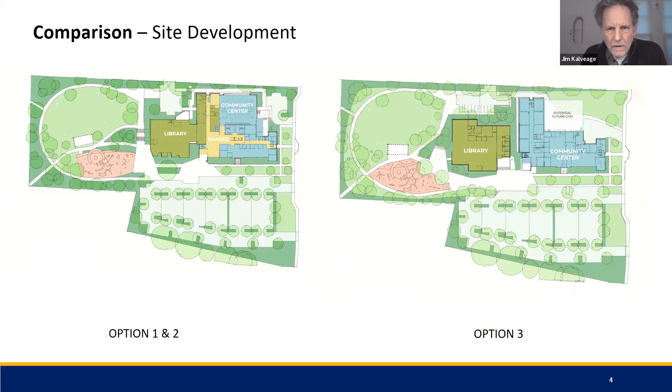This is just an enlarged view of option 3. Go to the next. And what this shows is how we're starting to really think more closely about what that space is between the library and community center.

So now it was previously 20 feet, this is 25 plus feet. It starts to feel quite different. We're showing a pathway that connects from the entry terrace to the library through this garden space. It's actually at the same level as the landing of the stair of the community center, so you can literally walk from the community center through that garden to the library.

As you might recall in the plan of the library, there's the idea of a meeting room tucked up at the north end, the top part of the plan. We're showing the potential, which we're really excited about, of having an outdoor meeting space off of that indoor meeting room, shown in that wedge shape white rectangle. So we're kind of excited how that space is starting to evolve.

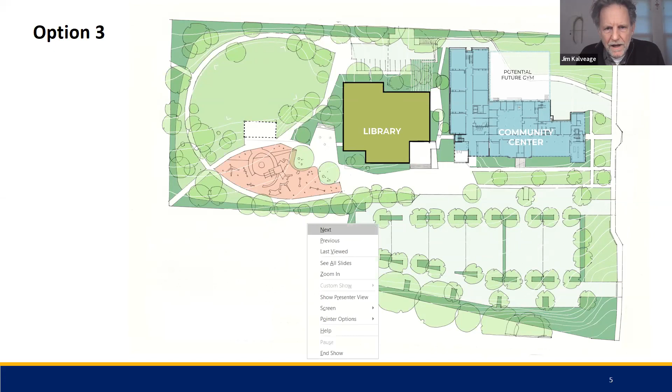Go to the next slide. This gives you a little bit of a close-up of the plan, and then these 3D views that start to show you the potential of that space. We feel like it's at a width now where it feels like it could be a lovely garden.

From that ramp that comes up, there's a walkway that takes you through that sliver part and even up the stairs to the upper part, north end of the Concord property. One of the things this shows too is the massing of the freestanding or standalone library steps down, so the height as you go towards the north is really just a little bit over one story.

And so it starts to really open up the space, something that's a little hard to visualize in plan, but we really appreciate the comment that came up last time, that the space was too narrow before. We feel like this is finding the right balance, where it's a more passive walking space, but it doesn't take away from the overall park.

Go to the next slide. This is another option that was brought up at the last meeting we wanted to respond to as well. As a freestanding library, what if it were located more towards the top of the property, north, plan north, also kind of northwest, but pushed up against the property line. In this case, the library's pulled away, more distant from the drop-off. Visibility to it isn't as strong from Concord as it would be in the prior location.

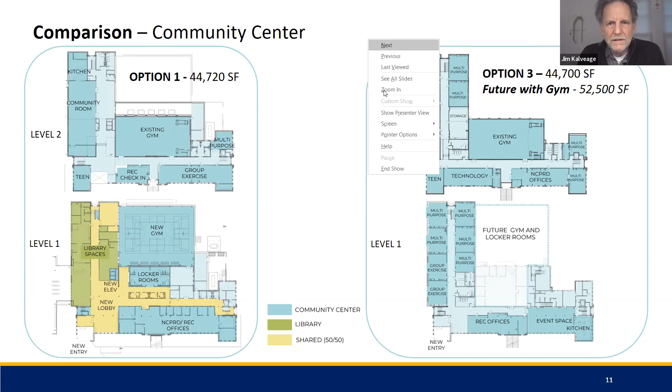There's a lot of discussion about sustainability in option 2, where we didn't have the CLT roof or the radiant floor. It's still a sustainable building. Energy-wise, you can see the long list of features.

The VRF mechanical system is still very efficient. We did a comparison between that and a radiant floor. There's a savings of basically, over a 20-year period, about $20,000 - maybe around $1,000 a year.

But with a radiant floor, you do get the comfort associated with that, and it brings the heat source directly to the occupants. Water design in terms of efficiency is the same.

Still looking at durable materials, bird-friendly glazing, connections to the park - in some ways even more enhanced, I think, in what we're showing now, especially the relationship between the Concord School and the library, which even has more of a feeling of being in the park.

We've looked at the possibility, as brought up, as we showed earlier, designs of a mass timber roof and radiant flooring. Those are additional strategies for discussion. The project isn't at this point a LEED project, but we are using the AIA framework for design excellence.

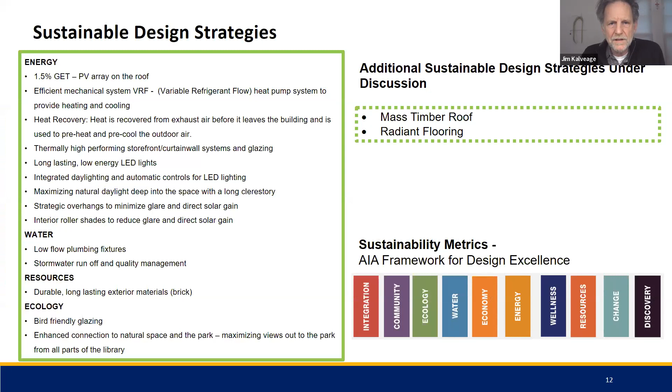We wanted to just compare the addition version here compared to the freestanding library.

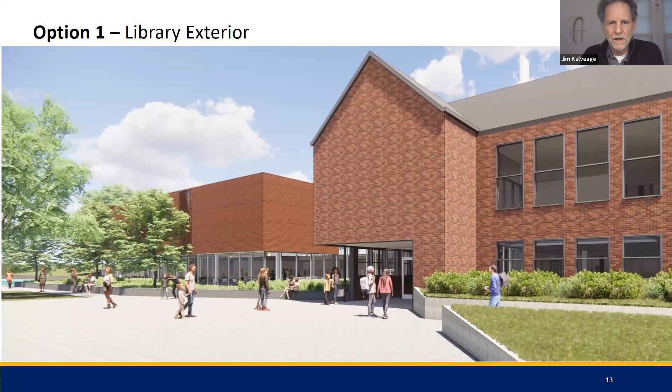Drawing off some of the virtues that we shared previously of the shaping of the roofs of the addition, a little bit larger open space, that kind of sense of entry is really, we think, strong in the library, but also very compatible with the Concord School.

So they're kind of cut from the same DNA, and the idea of a brick screen element that would filter light into the entry porch. A comment brought up at the last meeting is whether there's a way to create some of that brick texture and pattern that recalls the arched window above, the gable roof and entry to the Concord School - that filigree of brick above the entry porch carried around as some form of brick pattern and texture that could really provide a nice human scale and a quality that ties it back to the Concord School.

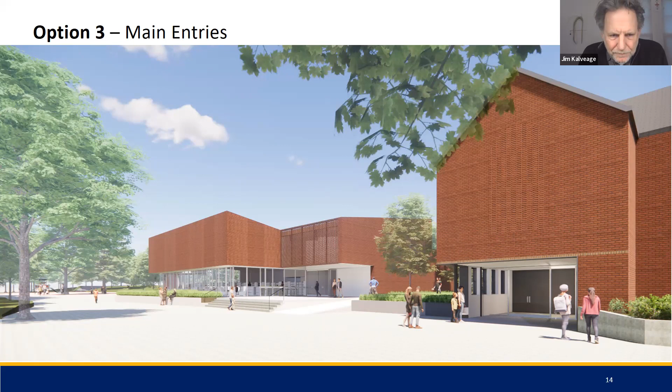Just another kind of view back, how the two buildings start to talk and relate to each other. The kind of openness into the library space as you approach puts the library on display, and then you're looking through the entry lobby, through the meeting room to a north clerestory window.

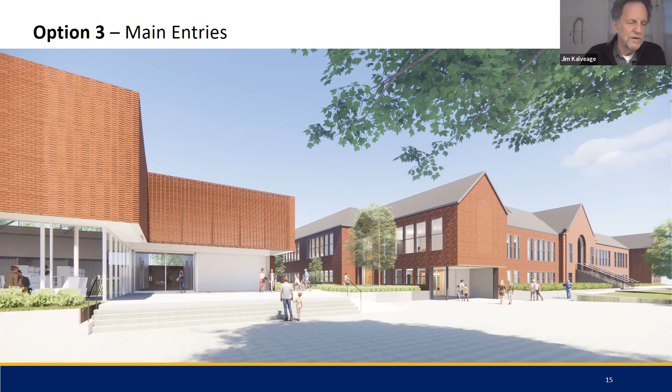We'll go inside here. This is what we showed previously, just the kind of model where everything's whitewashed. One of the things we've looked at more carefully is what is that view to the north or northwest, looking at a skylight there along that solid wall.

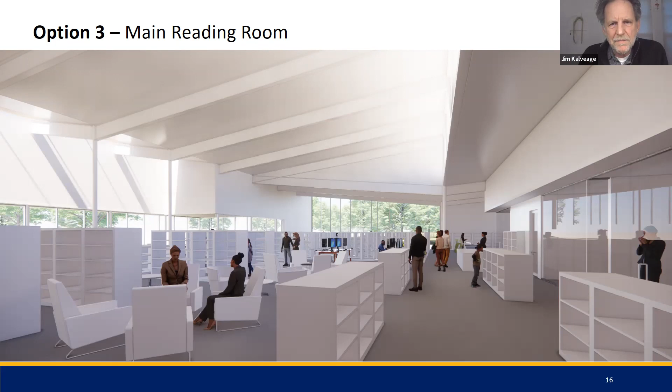So you're getting balanced light coming in from both the north clerestory monitor as well as the skylight that washes that north wall above the lower windows. Also that big framed window out to the park. So it really is about a library in the park and bringing the park into the library, and from the library engaging the park.

This next image starts to show what would happen if, in fact, there is a CLT roof that does bring a lot of warmth and character. CLT can also be DLT - DLT is another type of cross-laminated timber where the wood members are turned vertically and spaced a little bit apart, where there's a reveal and acoustical insulation integrated into it.

We did a project, a new urban school in Clackamas, and it uses DLT. It's a really neat material because you get the visual impact of the wood, the sustainability, and the acoustics all integrated together into the panel.

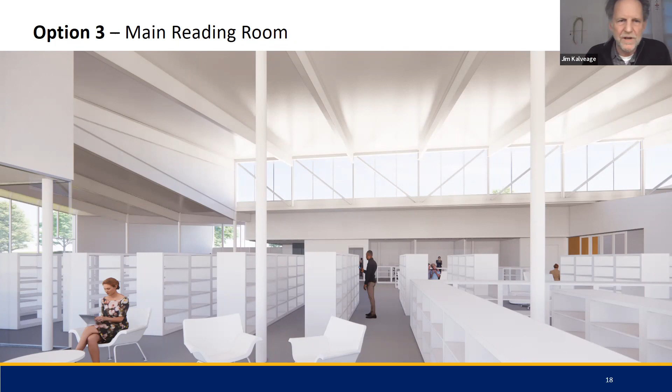But it's a big change. This is when you start to see the difference between a view like this, which has the white ceiling, versus the next image, which shows the impact of using a DLT type product. You also spatially start to feel how open, bright, and connected this building is to the environment, with views to the park and north clerestory light.

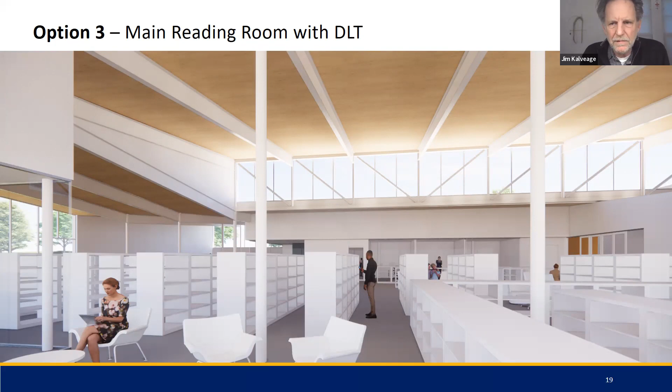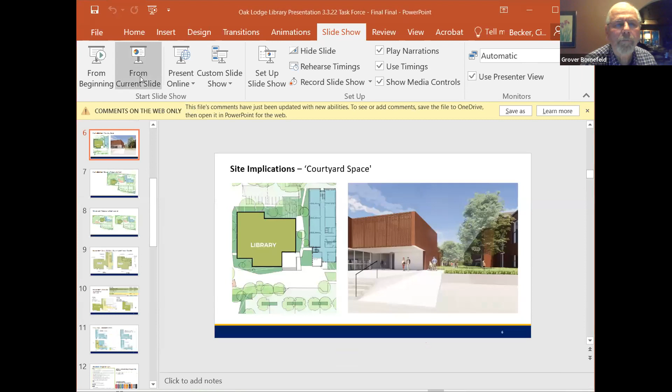Great. Well, what I wanted to say, so I just really did not want— oh good, it's going to come back. Can you see it? Yeah, it's back farther in the presentation where I was referring to, because those lines are— there we go, right there. See, on the other side of the plate, I guess I picked the wrong one. Oh yeah, no, the one you were just on, back one. That one. You see from where the play area is, north or up towards the parking lot, there seems like there's stairs there. Are those stairs? No, on the other side of the play area, up. No, Grover, everything that's in white there, it's just done so it's visible—those are contours.

So that would be a great change. However, I think providing some stairs or seating for parents would be something we should consider, both on this scheme as well as the other one. Okay, good. All right, so what I really want to say, besides thank you for doing that work, I appreciate it. I'm always concerned about how much work gets done with some thoughts from the group, et cetera.

And every time you guys come up with nice stuff, I'm very clear that our job here is to honor the Concord School. But I want to be clear, having it farther away doesn't unhonor it. It actually lets it stand with all its glory from McLaughlin and everywhere else, tucking it around the other way. So the idea is, how do we maximize the park space? I don't want to negate anything you did, but I want to get that in this conversation.

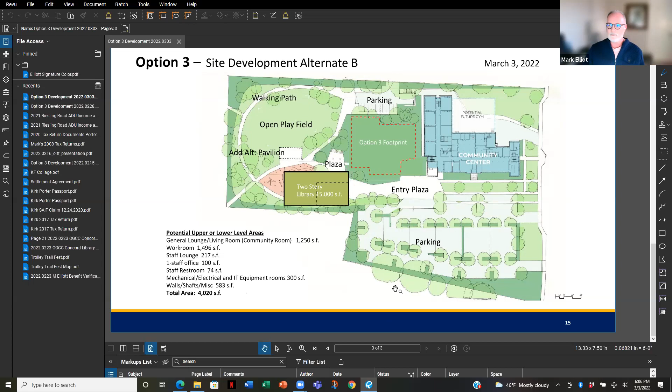The intent here, I think, is to see that by taking advantage of some of the topography, it's possible to consider a lower level for these areas, taking advantage of the topography change. When Grover and I were just looking out there ourselves, we could see something in the neighborhood of an 8 to 10 or 11 foot grade difference between the parking area and the upper open play field area. So that's really what we came up with, just looking at this rather quickly. I'm happy to share that. Thanks.

Thank you. I just wanted that to get put into the mix because it does free up more park space, and it does make a smaller footprint, and it takes advantage of the topography, and less dirt has to be moved. Because I have a real concern about how much water goes through that site. The water was pouring when we were there, through the site, not just from the sky. Yeah, I mean, I think it's... oh, go ahead.

Well, I appreciate that option and I'm beginning to think through it, just from a grading perspective, because I've been staring at the grades and the 15 to 20 foot grade change for a long time. I think the one thing you have out on the site right now is that large play field, and conceptually the idea of putting a structure within that. The issue for us becomes how you navigate that and get ADA access from the upper level down to the lower level.

And how do you put in a play area the size that it is? In order to meet accessibility standards, it essentially has to be flat. So a substantial amount of the grading that has to happen with any of these options is primarily because of the play area and also getting that ADA path up. Regardless of where you're putting the library, you're still having to spend a significant amount of money on that.

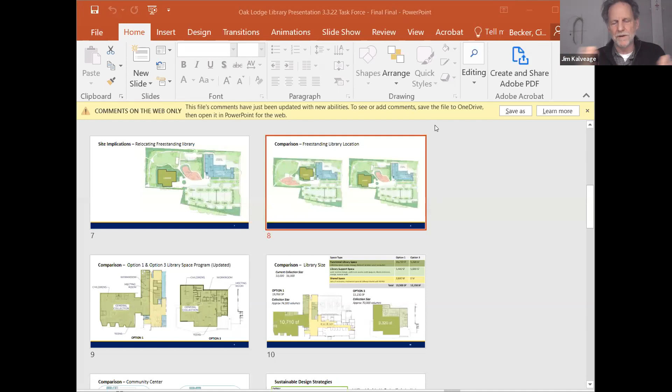And then the separation between the library and the community center, I think they're still on the same campus, but they aren't right next to each other. So the shared use of popping across to a meeting, a lecture by an artist or something, would be it's just physically more removed.

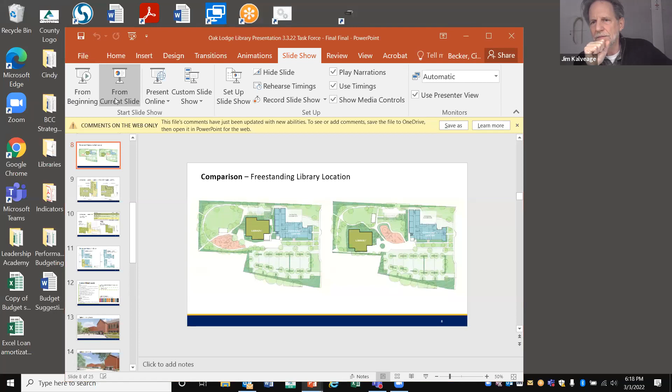Well, one of the things that we've seen in some of the libraries we've visited is when they're located in a park, it's a real nice atmosphere to be able to look out the window and see the park and really get the full view. I was just a little concerned that option 4, for want of a better term, precludes some of that option of looking at a park.

I guess nobody else agrees. Well, if they just flipped it over the other way and rotated it 45 degrees, you'd get the view right up into the park area.

But I want to be clear, the difference between where the 2 libraries in these 2 pictures are and the library, we're not talking 40, 50 feet. So I'm a bit concerned about this comment about no more proximity. Actually, it's a big difference. The entries, there's probably a 200-foot difference. Those parking stalls between those black lines, 60 feet. So it's probably 150 feet. It's not an insignificant distance at all. It's pretty significant.

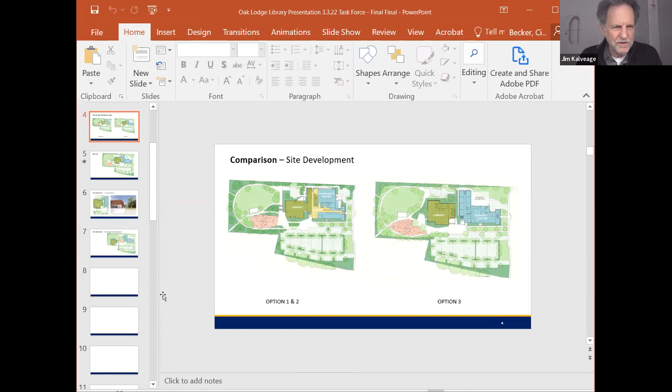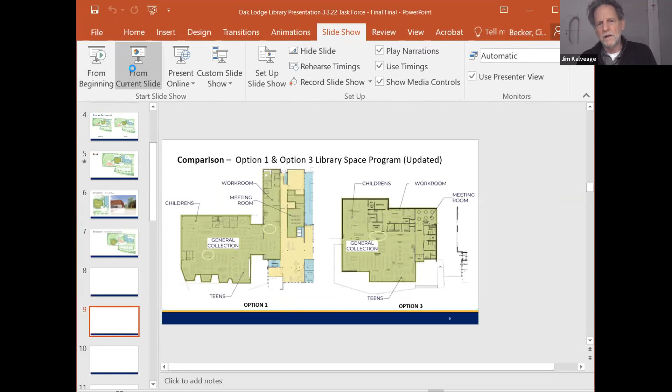This is 25 feet. The next plan kind of shows it a little better - yeah, the number 5 slide. Yeah, there you go. Anyway, I believe, Kurt, we ended on like 25 feet between. Yeah, just slightly larger than 25.

It made a big difference, you know - it was quite an impact to slide it. And it's not to say it's right yet, but the idea was to make a purposeful, nice open space between the two buildings, but not push it so far that we're taking away from the larger park. So that was the balance we were trying to do.

And that's not significantly different. And that's what I needed to hear. No, it isn't - and you can see the relationship of the drop off. It's basically just as close because of the geometry of the long area for buses or cars to pull up. So the distance from the physical drop off to the entry door is the same.

Okay, thank you. And let me see - the park space, I'm with Mike on this as far as really wanting to know some numbers here, just to get a better sense of what the comparative park space is. It actually looks quite good in these diagrams, and once again I think you've done a good job on the design here, but I would like to hear the numbers.

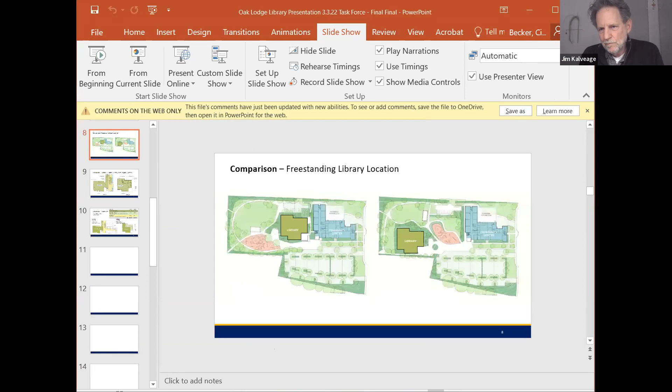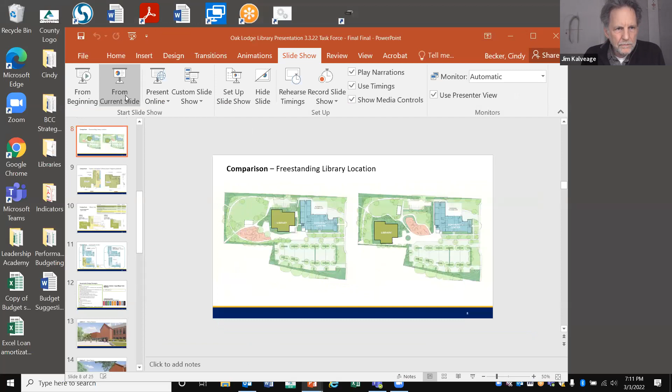The sun sets at the bottom of those pictures, just so you know.

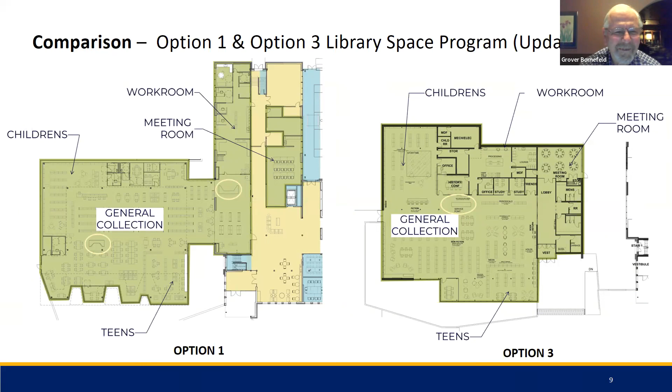So in other words, sliding the building towards the bottom of the diagram. Yeah, I do. It actually does come forward a little bit of the existing facade of the Concord, and it could slide more. Again, it's a very similar discussion to what we were talking about, the space between the Concord School and the library. That's really important to get right. We also want to make sure there's enough landscape, both as a buffer and as an arm that comes out, that defines that edge of the parking lot where you feel like it's an arm of the park coming out, and we want to have landscape around the building. And we also want a generous sense of walkway to the park. So what's that balance, you know, there's no reason the building can't move.

But we want to make sure that, Kurt can speak to this, that we don't end up feeling like it's too narrow. That would be my one concern. Kurt, do you want to chime in? Well, sure. It's also about kind of sight lines into the park, and being able to feel like there's a real graceful transition between the parking lot, the entry to the community center as you make your way in there. So certainly I think there can be some movement, but it's also just thinking about what is happening along those two sides to make that park feel really inviting.

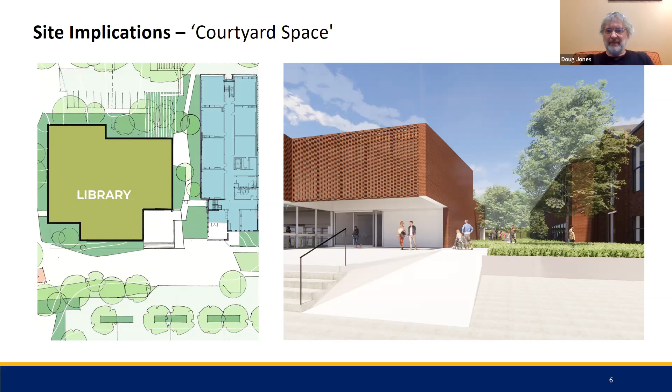I feel like I saw a slide somewhere that said that ramp was going up 2.5 feet. That's about two, so you'd have to think about looking at those gradient lines, how far west you'd have to move the building to make up 2.5 feet. And I think then what you're doing is you're putting the library where it's blocking. I absolutely understand, Paul, the interest in making this as accessible as possible, but at the same time, you're kind of inhibiting things. The library where I work now, the ramp is probably going up 5 feet, and people make it, but it is a struggle. But 2.5, when I saw the 2.5 feet, I'm like, oh, that's not so bad. But of course, every little bit, you're right Paul, is definitely an obstacle. But by the time you move the building enough to make up the 2.5 feet, because of the grade, Kurt knows better than most of us how far that would be to make that difference. I don't know.

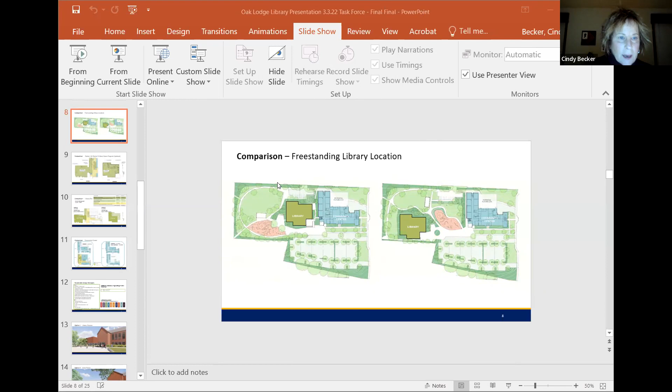Can we see those pictures again of what that one looked like? Seeing them is nice, but it doesn't give me answers. Which picture do you want to see? I'm not sure which one. Could you show both of those if you just made it the main picture? No, the one you're on is fine, just make it bigger. I'm trying to, my computer is very, very old. Current slide, there we go. You're doing a good job, Cindy. It's not easy.

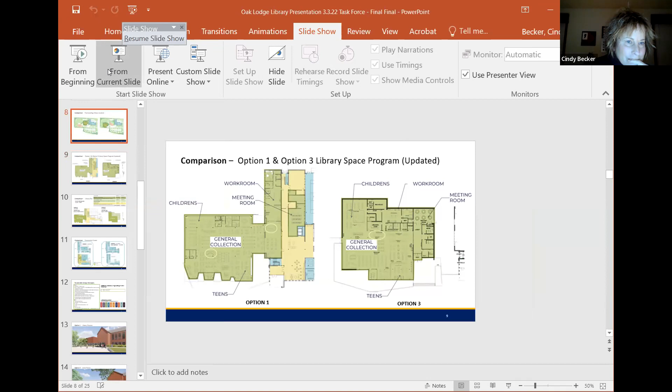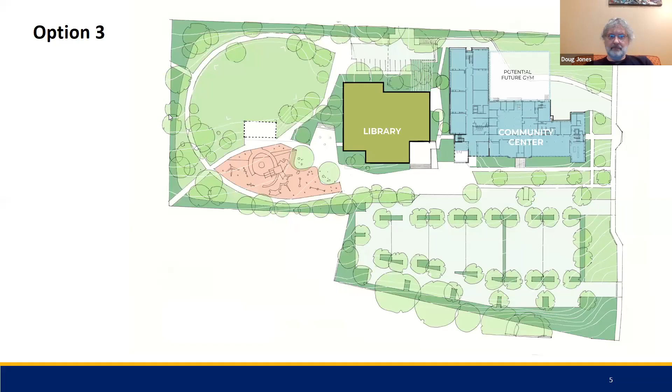Here we go. That's not the one you want.

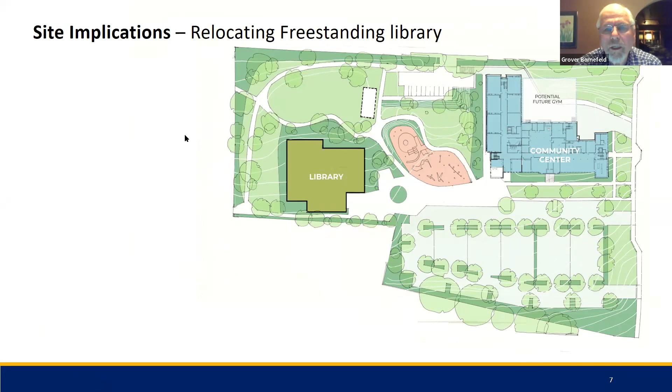Well, while it's there, let's talk for a second. You see those gradient lines that I was calling steps? I still love the idea. And if you look at that little grass area out there, just consider that it could be a pocket park with steps, and it could be an amphitheater, etc., as opposed to just showing the gradients. I don't know what else you're going to do with that space.

So that's something to consider, as opposed to throwing out the steps. The steps were a big attraction for me.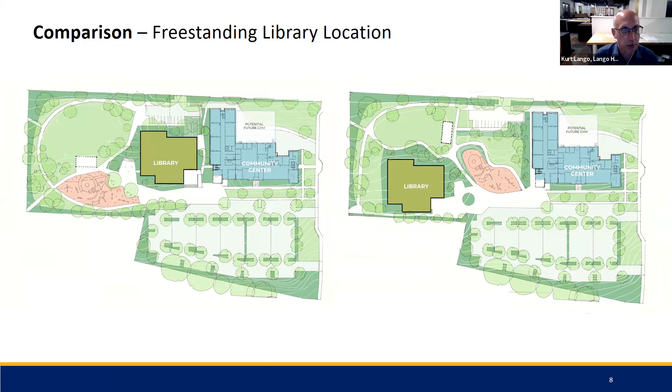Just a wild guess, how big is the capacity for that amphitheater? I can't get a sense of size - 20 people, 50 people, 100 people? No, probably not 100, but it could be anywhere from 30 to 50 people. Okay, thanks, that helps.

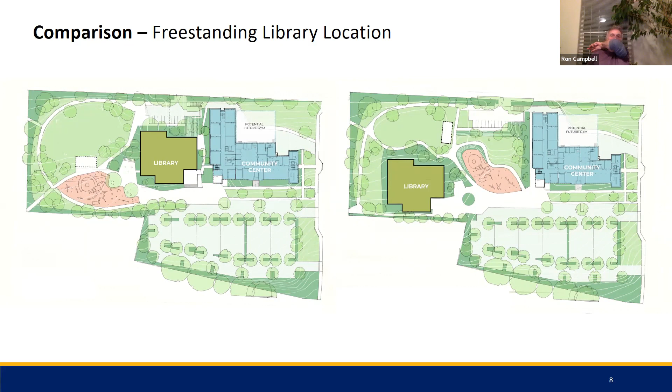There's the rendering of that view from the northwest that starts to show the amphitheater a little bit. It could be seating that wraps around - you could build up the topography a little bit. There's definitely a sense of a story time, more intimate outdoor space.

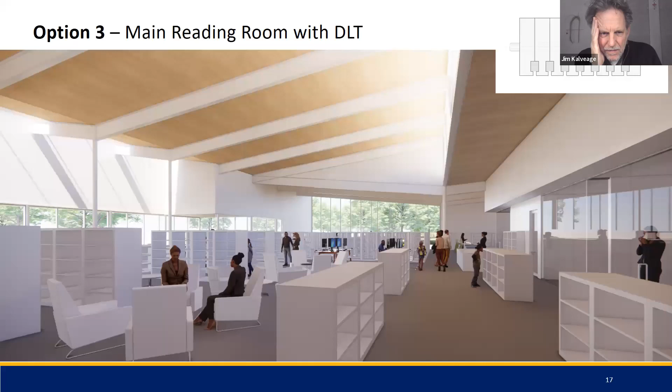Keep going, we're getting close. Yeah, there it is, to the left. It's a little hard to see, but there's a couple of people sitting on stairs - probably 4 risers high, 4 steps high, and they'd be 18 inches wide, so it's a place to sit.

Okay, just for clarity, my proposal was about this model right here that's closest to the community center. Can we vote on that proximity - freestanding, but at that proximity, whether you move it around or not - can we vote on that?

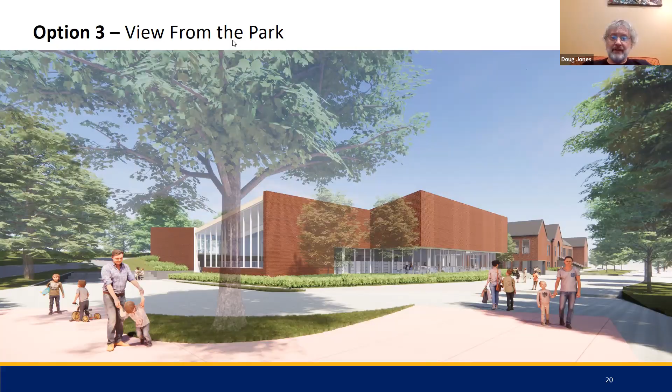Let's see, Christy, I don't know if you're able to catch it. She votes detached. Okay, and did we lose Shonda? I don't see her here. Shonda, are you here? Might have lost her, but I guess that's all of us at least that are here. Oh Shonda, there you are. Shonda, what are your thoughts on a detached library?

Liz, Doug, you have to unmute her. I think she had her hand up when you asked the question. If that helps, can you unmute her? Can you hear us? There we go. Okay Shonda, now we can.

Okay, I'm sorry, I feel a little bit handicapped and disadvantaged with my little tablet. I cannot see the pictures, and I had requested hard copies like Catherine sent us initially going through this project, to really be able to study them at home. So I am not going to be voting because I don't have enough information - I can't see the pictures. This presentation will be on the website tomorrow. Doesn't help on my little teeny tablet.